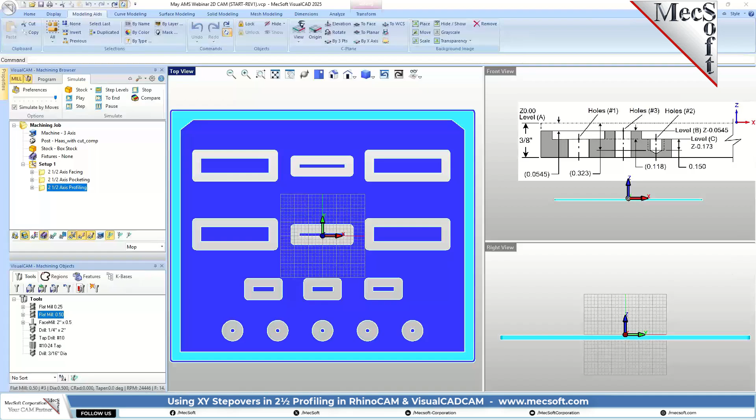Let's go back over here, 2 1/2 axis profiling. Now in this profiling operation, you'll see that we have another level right here. If you look right here, this is another level, this level inside these areas. So we got holes which are tapped holes here.

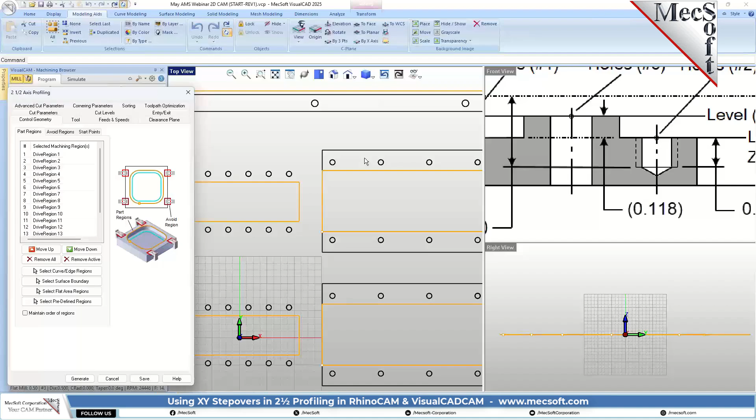This is the tapped hole that represents that cut level. So we actually have, I guess you could consider them pockets, but it's only a pocket when it comes out to here, because you don't want to pocket all of this out. You've already cut the inner hole out. So we're going to use a profiling operation, and we're going to give it an offset so that it cuts just enough to get out past this edge right here.

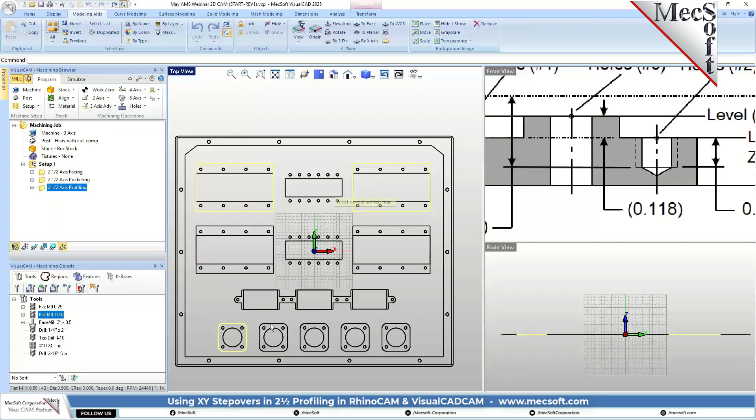Okay, so we got our geometry. Let's see what we're going to select for geometry. We're going to remove this, and we're going to pick these outer edges here, and we're going to pick these outer ones here. So all of these curves right here, this is a pocket.

Okay, this is this cut level right here. It's going down from 0545, and it's going down 0.118. Very similar, or nearly exactly the same, as this pocket on the outside. The depths are exactly the same. But instead of using a pocket, we're using a profile.

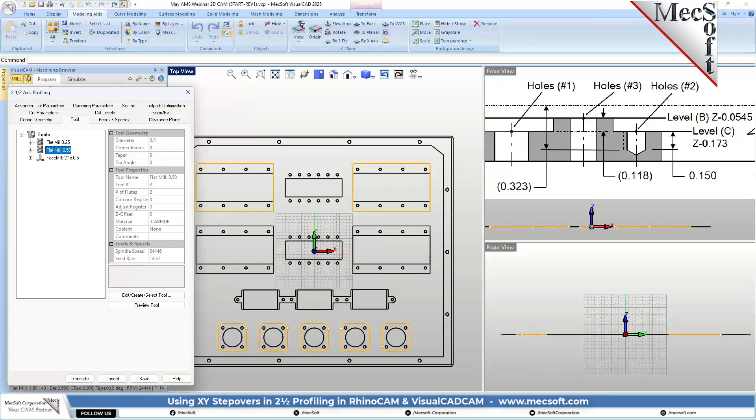So let's go ahead and right click, and let's select the tool. We're going to use the 0.5.

Feeds and speeds, clearance, cut parameters. Again, on the cut parameters, we're going to leave it at 1,000th. We're going to leave the stock to 0 since we're finishing up all the way around here. And for the cut direction, we're going to leave it to mixed. We're going to start at the midpoint of the curves for the start cut point. And for the inside outside, we just go ahead and use this option. We're going to cut on the inside.

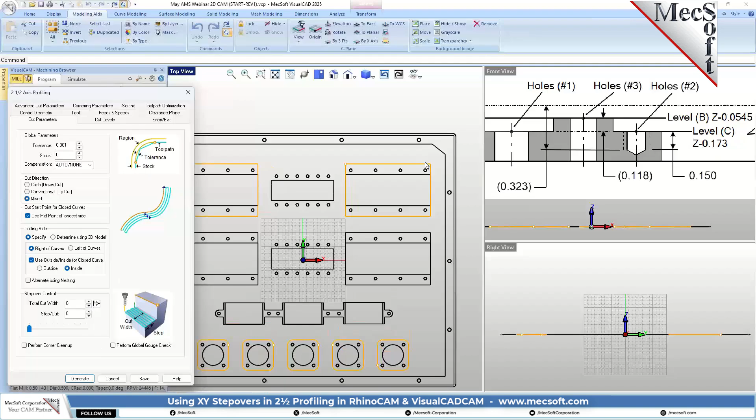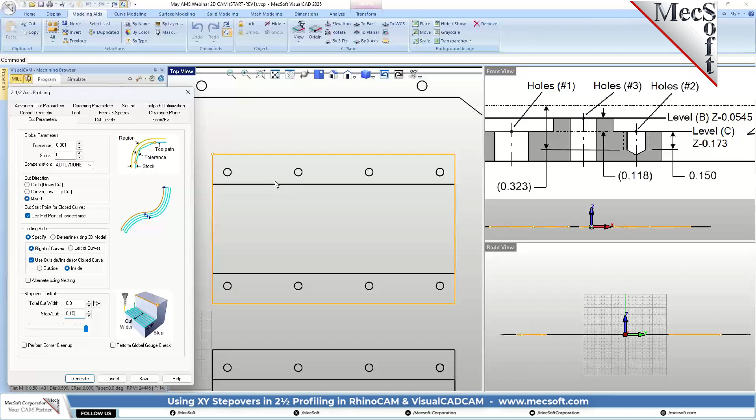Now here is where we're going to use it to calculate a roughing and a finishing. So we're going to give it a width. This is going to be 0.3 this time. And we're going to use an offset of 0.15. So what's going to happen here is it's going to back off from the perimeter 0.3, which is far enough away to get past this hole. So it's going to be like a little shelf right here.

So let's look at what else we got on our cut levels. Again, let's look at our section view. This area, what we're cutting, is a profiling operation. And it's cutting along this edge right here. You see this edge? And this edge, and it extends out past this edge. This is that edge, outer edge, inner edge right here. And these holes are the drill and tapped holes right here. So the section view only shows one side of it. You don't see all of it.

So the start of the cut is going to be at the negative 0545, because we already have it machined down to that cut level. We're going to start there and want to come down another 0.118. So let's enter. We're going to use the pick top again. Just like the pocketing, we're going to enter negative 0.0545. That's going to tell it that it's going to start cutting right here. And we're going to cut down 0.118, just like the pocketing.

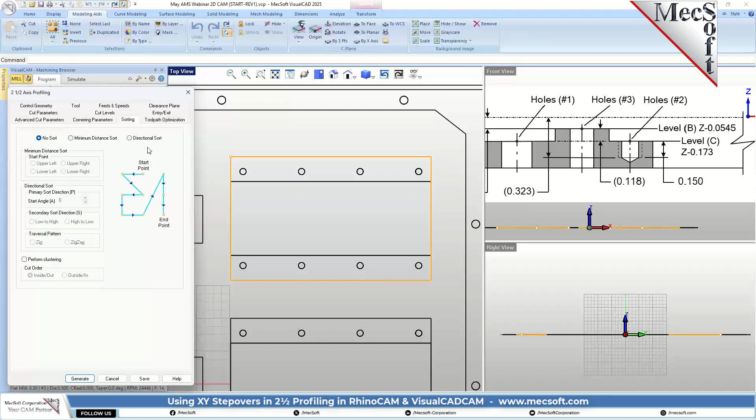Let's generate this. Turn that on. Okay, so you'll see what happened is it created not 3 cut levels, but 3 stepovers. So the first stepover cleared it past this cutout right here, and then the last one is the finishing path.

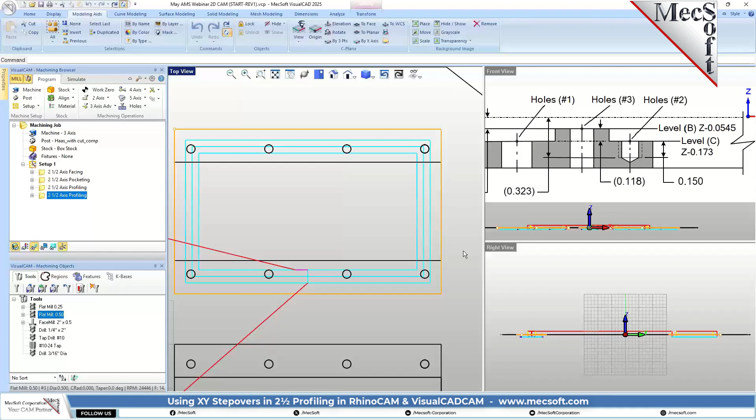Now you might be asking, well, you're cutting air right here, you know, because this already goes all the way through. I'm not going to worry about that. The way we did it right here is the fastest and easiest way to understand how to do it. If that concerns you, you can go in and create like a square box around that area if you want to do it that way on both sides. It's up to you.

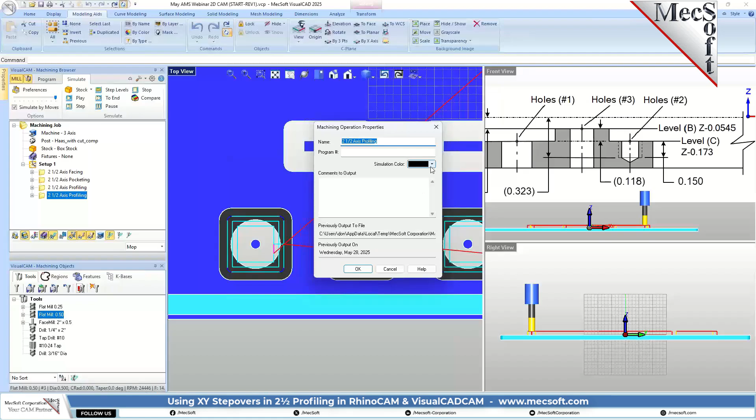But we're just doing this perimeter on the outside. And it's the same over here, and it's the same here. The offset, X and Y offset, is enough to clear it past these circles. Let's go ahead and simulate that. Let's change that color to, say, green.

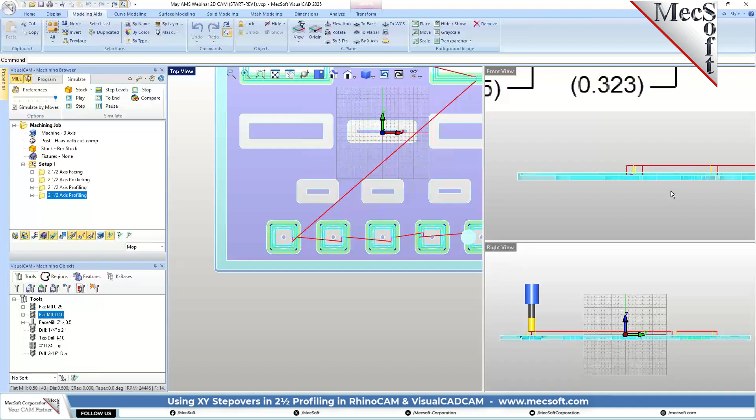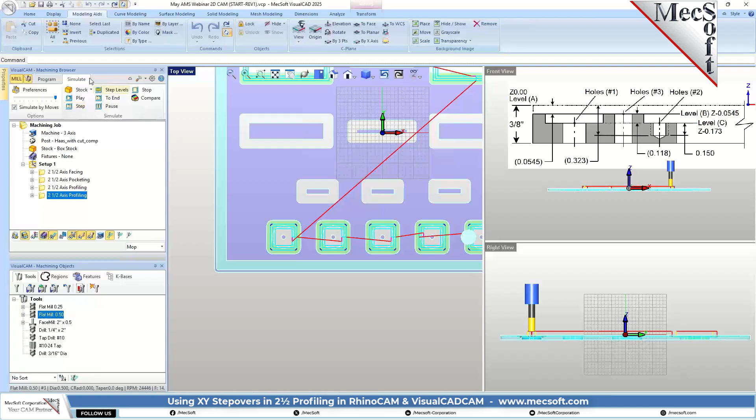And let's look at our profile here. So we have another, we need to change this stock to semi-transparent. Okay, so this cut level is at the same level as the pocket. You'll see that it starts over here and it cuts, this profile goes along at the 0.118 depth. And that is at this cut level right here, level C on the drawing. And if you want to, we can simulate that a little bit slower.

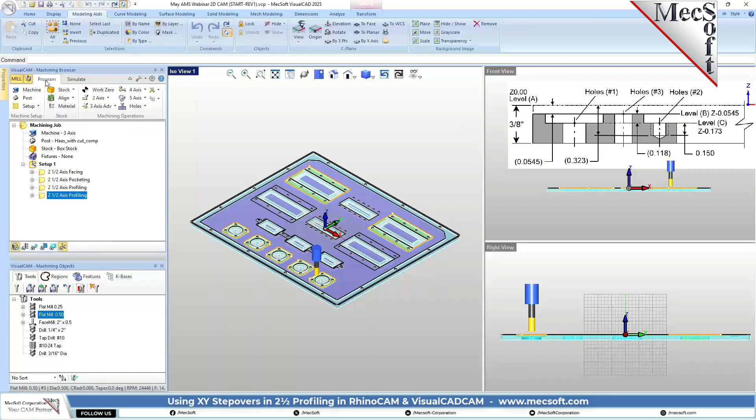Okay, so that it cuts out. Let's turn the toolpath off. So it cuts out. Let's turn this back to opaque. So it cuts out past this through hole.

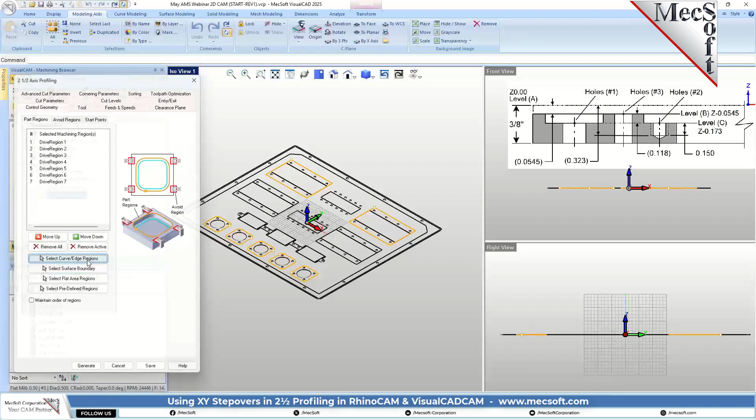So we get that lip that we need to do these tapped holes on. And it does the same thing on the other side. Actually, I didn't select these 2 either. So let's go back in here. We're going to hold the shift key down, and we're going to pick these additional ones.

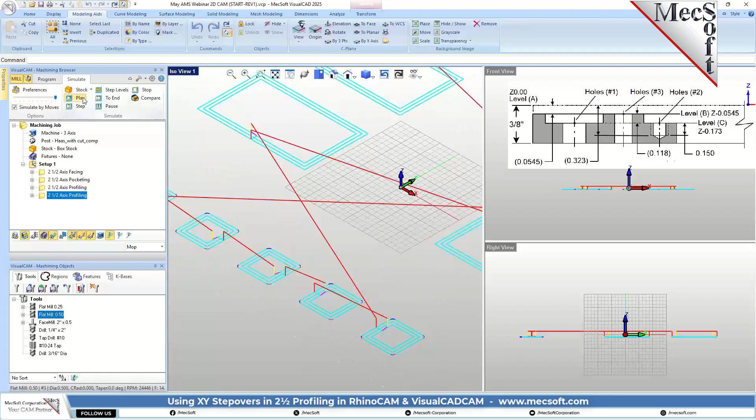So it adds it to them. Let's regenerate that. Okay, so we got the 4 cutout profiles and these 4 or 5 through holes there. Let's simulate that again real quick. Okay, so there's our part as it is right now.

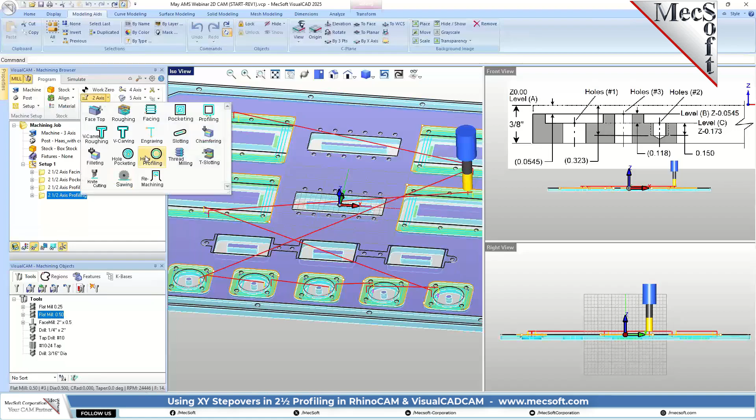Now, what do we need to do next? We got about 10 minutes, so we're going to go a little bit faster in here. So we're going to do another profiling operation. Okay, let's do another profiling operation. Let's get rid of that.

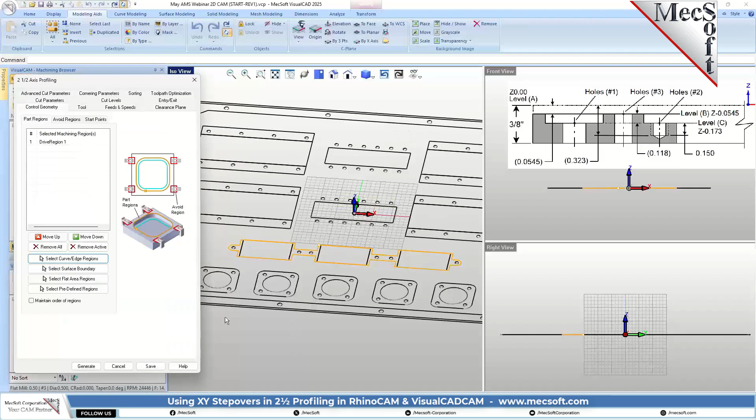And for this one, there's another ledge right here. Okay, so this is the one we're going to use, the outer one. And again, you'll be cutting some air. I'm not going to worry about that. So we're going to use that for the cut level. The tool is going to be the same. Everything's going to be the same.

That should be here. I need to do that to, I believe, let's see what it needs to be. Okay, this time it's 0.2. And it's going to be a 0.1 for the step over. Okay, for the cut levels. And where are we going to start at? Very similar. We're starting at the top of our facing operation, and we're cutting down to this level right here, just like the pocket and just like these shelves right here.

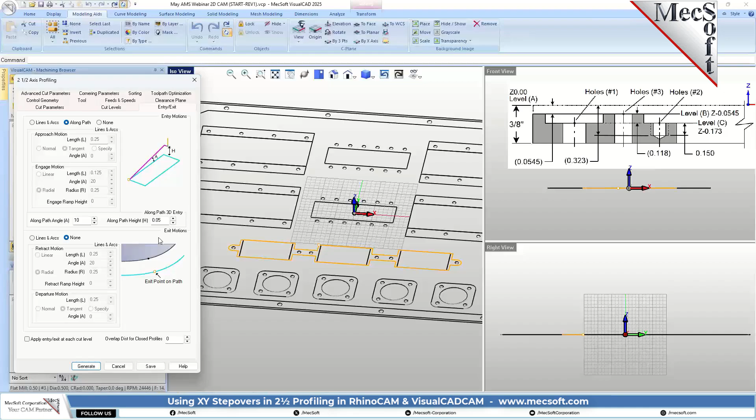So we're going to do this. The pick top is going to be negative 0.0545. The total cut depth, again, is going to be 0.118. So we're going to make one cut level, 0.118. And for entry and exit, we'll do a ramp, and we'll do a retract straight up. And I believe that is it. Let's generate that.

Okay, so let's look at the tool. We need to use a smaller tool. Okay, so we look at the top. You'll see that it's doing a profiling operation. The stock allowance is 0, so it's a clean out.

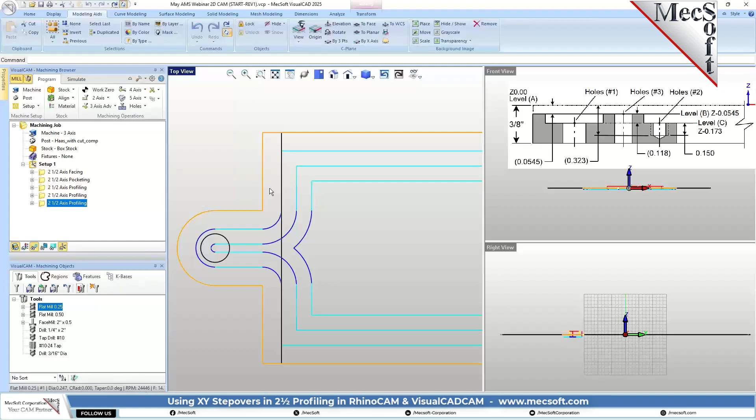It's like a finishing pass on the inside. So it's starting 0.2 away, and it's working its way in to do a finishing pass around it. And again, this is cutting air, I know, but it's the easiest and most expeditious way to program it. So let's go ahead and simulate that real quick.

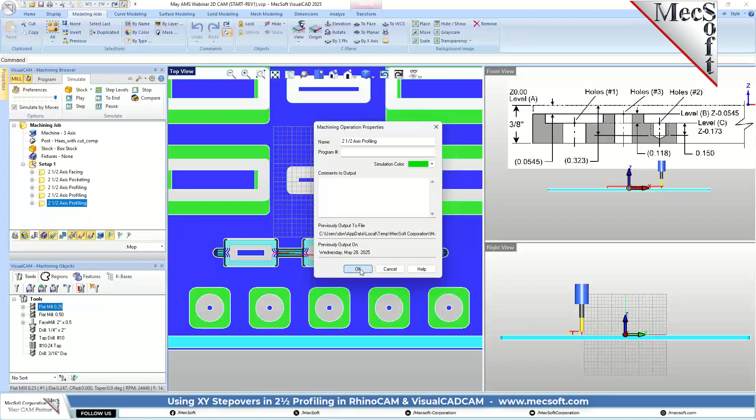Let's change this color real quick. Change that to green. Okay. So there's our shelf right there. Okay, so let's go to the top.